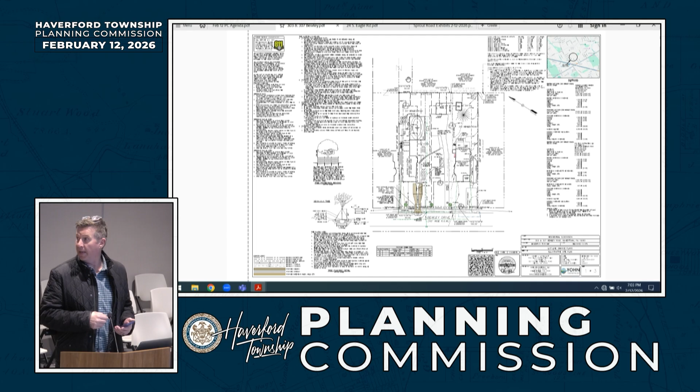So this is I think our third time here. We've had the engineers go and do everything. It seems like everything's been good. That's about it. I don't know. Right, I'm just a homeowner.

Do you want a quick minute to gather your thoughts? But we've just introduced the plan. Yes, good evening, I'm sorry I'm late, I hit a little traffic. My name is Tyler Vu. I am the co-applicant of tonight's meeting with Richard.

All right, so this is a little bit different than what we've seen before. So if I can summarize, we have an application before us for a lot line change. This does not include the construction of a new house as we had previously seen. This would convey approximately 11,000 square feet from 307 Bewley to 303 Bewley.

And I understand that you went before the zoning hearing board in November and received three variances, correct? Yes. Okay.

So the application then is again going to be just a lot conveyance. The only change here is that we have the conversion of an existing concrete walk at 307 Bewley into a driveway. Is that correct? Yes. All right, so there being no land development here, we're just looking at the lot line change.

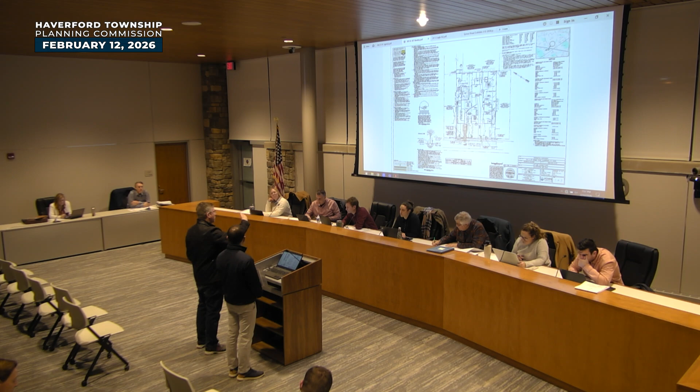Behind there's a narrow piece of property, and then there's an alleyway between Bewley and Valley Road. There's an alleyway in the back where the people on Valley and a couple houses on Bewley have their garages, and I've seen where that would be. I've seen the lines. I've seen wastewater in the alleyway there where that would be, so I'm assuming it goes there.

I do want to clarify, not wastewater, you mean storm sewer? Stormwater. Okay, stormwater. Yes, sorry, stormwater.

So my recommendation is that the storm sewer, if it does continue beyond the point indicated on the plans, that should be marked on the plans. Because as it stands, it looks like that's either the terminus or the origin of that storm sewer conveyance pipe. But if it does continue further back into the property, that should be noted on the plans.

I don't know, we'll have to ask them. Because the easement is shown to terminate.

Actually, I'm sorry, they did a survey, and you know what I'm thinking? I'm looking at the side yard. The easement lines do go all the way through, but the storm sewer pipe itself is shown as ending. So the easement continues to the back of the property, which is fine, but I would just suggest that the storm sewer pipe actually be shown kind of where it continues.

I'm not 100%, I don't know, I'm not an engineer, is what they did. I would have to ask them. Sure, because I'm thinking about it now. There's one that's down the way a little bit on the alleyway, so I don't know if that's a beginning that goes down to the valley or not.

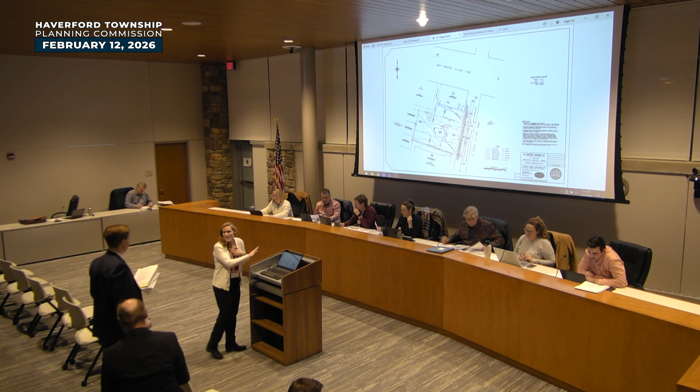Okay, next up we have our applicant for 24 South Eagle Road. This is GK Property Holdings for a zoning map amendment request. For planning commission members who haven't dealt with one of these before, a zoning map amendment request is simply to change the zoning of a particular property to a different zoning district. This is not a land development application, not a subdivision application, and not a change to the zoning district itself or any of its requirements. This is just a zoning map amendment. With that in mind, I'll turn it over to the applicant to further explain their application and hear their proposal.

Good evening, my name is Finton McHugh. I'm from the law firm of Petrikin, Wellman, Damico, Brown, and Petrosa in Media, Pennsylvania. I'm representing GK Property Holdings. With me tonight are Kevin O'Donnell and Greg Giuliano, the principals of GK, and our project engineer, Dave Damon. We were here before you last summer, and you recommended that we request a rezoning of the O1 office portion of the property, so we're here doing that.

We've also amended our plan in response to some of your suggestions. In particular, we moved the building forward, as you'll see in the exhibit package. The previous building was set back intentionally to conform to the 50-foot front yard setback, but in accordance with the Planning Commission's recommendations, and I think the overall streetscape for Eagle Road, we've pulled the building forward. This gets rid of the horseshoe-shaped driveway we previously had, and we created a 90-degree driveway that, also by recommendation of the Planning Commission, lines up with the driveway across the street that goes into, I think, the Starbucks.

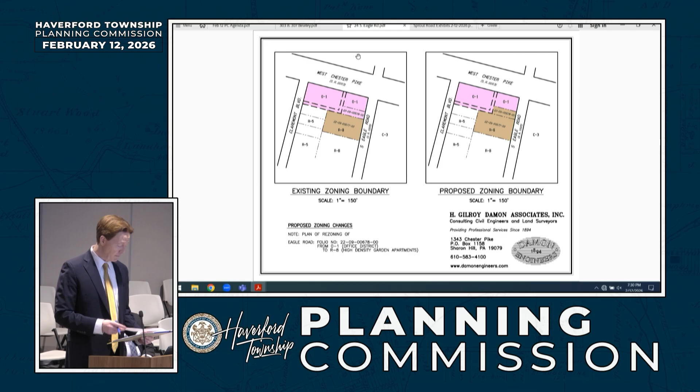If the board has no questions of me, I'd like to ask Dave Damon some questions.

Dave, can you introduce yourself to the board and explain your professional background? I'm Dave Damon, a civil engineer and land surveyor with H. Gilroy Damon Associates. I'm president of the corporation now - I'm like fourth generation Damon involved in that business.

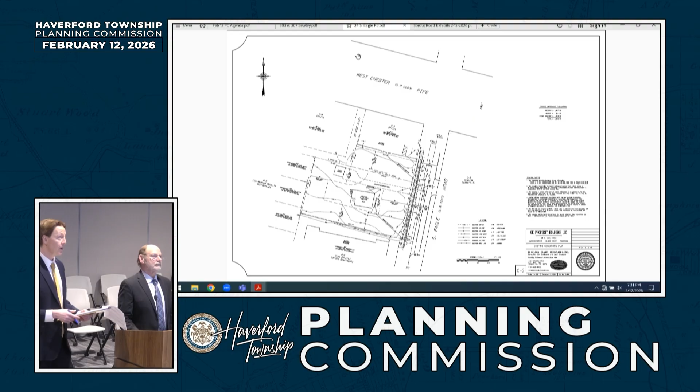That's zoned R8, and it's larger - almost a half an acre, 21,162 square feet. It's just north of the Haverford Arm Apartments, which has a side yard there noted as 11.8 feet.

I don't know if I have all the plans here, but there's a comparison of the zoning - I think Exhibit 2A is an excerpt of the zoning map, and I've crudely highlighted the property. Does that show the property and the split zone nature of it? Yeah, it shows the property, bounded by O1 zoning to the northeast on West Chester Pike.

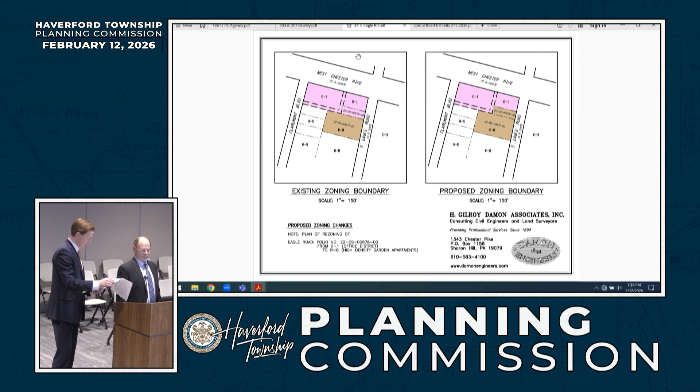I included an exhibit I don't think I have on this computer, but it's a Google aerial photo showing the other surrounding properties you just described. Yes. Exhibit A5 is the color zoning plan, which I've pulled up on the board.

Can you explain generally what's being proposed? Well, as you just said, the building's pulled forward, set back 15 feet from Eagle Road. It pulls back about 130 feet from the Claremont Boulevard residential properties that abut it in the rear. There's a single right-turn-in, right-turn-out driveway. It provides the 20 parking spaces required for zoning, and it provides a turnaround for trash and delivery trucks.

Does the back of the site have the required buffer planting strip? It has to, and actually there's over 50 feet of green space there, which provides the open space required under the ordinance. So quite a bit of buffering could be done there, including a raised berm. I know there were concerns about people hearing noise from Primo's Hoagies and the adjacent apartments, so that's something we could address there to help buffer those properties.

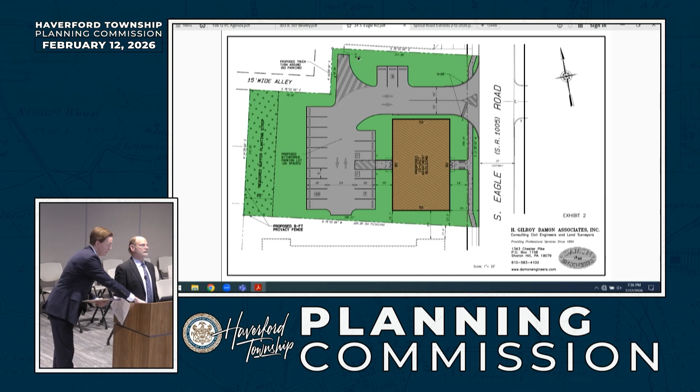With the consolidated properties and the change to R8 zoning, it would still have a non-complying lot area. Required is 2 acres, it's only 0.596 acres. It complies with the street frontage of 50 feet with the consolidated lots. Building coverage would comply at 15.4% versus 20% required. It's just over on impervious cover, so in the final design it's possible we might bring that into compliance. The front yard and side yard are the two big dimensional variances we'd have to obtain. And for the rear yard, we maximized that to 125 feet.

So we would go through with zoning before the lot consolidation and land development process? Yes, if the zoning change is approved, the next step would be land development.

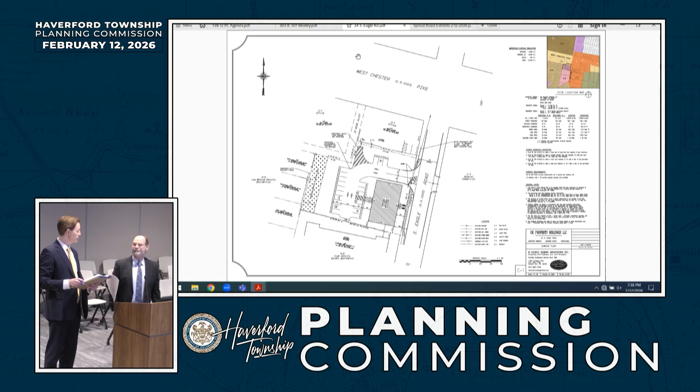Do you have any other comments on how this acts as a transition or generally fits with the neighborhood? As far as the comprehensive plan, it provides housing in a mixed area, giving residents of the apartments the opportunity to walk to the commercial areas, so I think it creates a livelier setting than what's there now. I have no further questions.

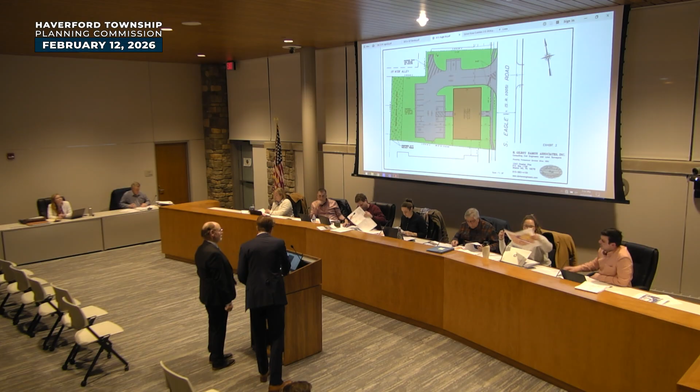On A2A, just so I'm super clear, that red outline, it's just this little sliver here, right? Can you put this one back up on the screen? Yep, that's it. Okay, I'm clear, I don't have any other comments or questions on that. I'm fine.

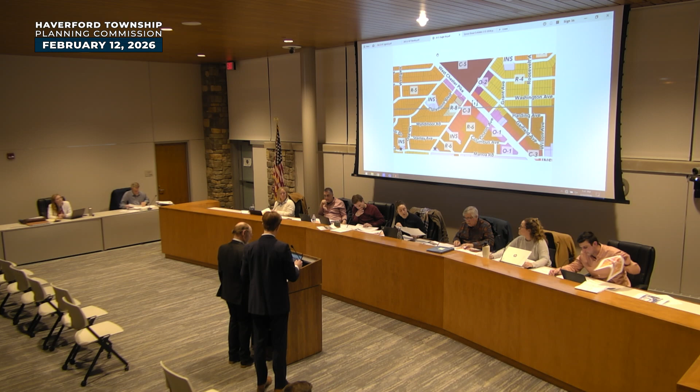Thanks. If it's helpful, the A2B exhibit is the clearest to me, identifying the parcel numbers for each of the two parcels, showing it going from pink to the brown. I see it, I was going to say fawn, but it's the color of the day. Taupe, tan, ecru. I think ecru is a little light.

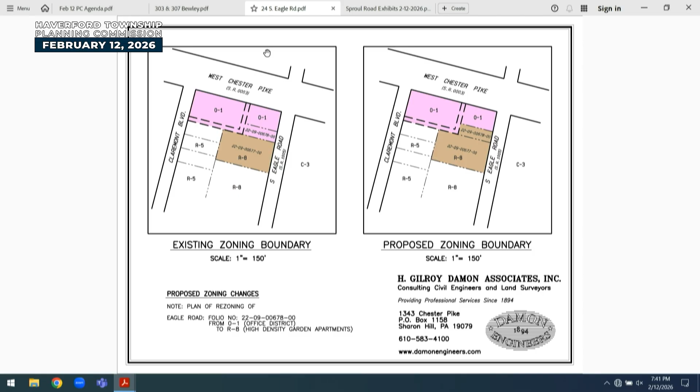Kim? No comments. I appreciate you guys listening to our feedback, incorporating it, and it's great to see you back here for this request. Angela?

No, I have no objections to what you're proposing here. Just out of curiosity, when you were in the summer, you were looking at property across the street. Is that still being pursued? Yeah, we're still pursuing that, preliminary final plan submittal coming soon. Okay, but didn't that involve a zoning change also? Zoning wasn't changed, variances were granted. Oh, you already went through that, okay.

I have no comments. This is, as you noted, a recommendation from us from when you first came before us. So I have no additional comments or questions on this. Thank you.

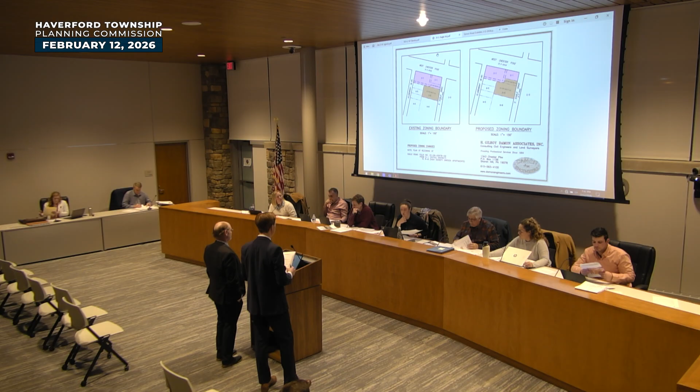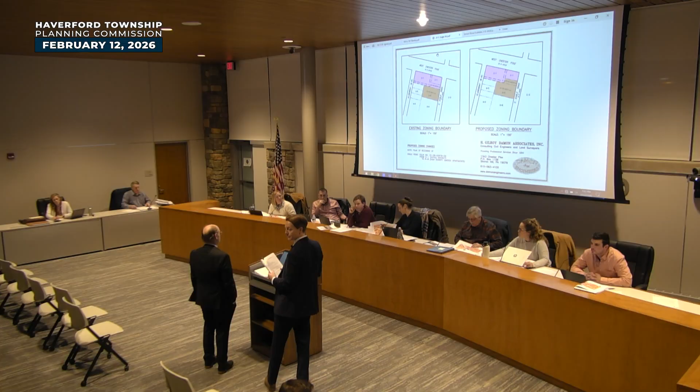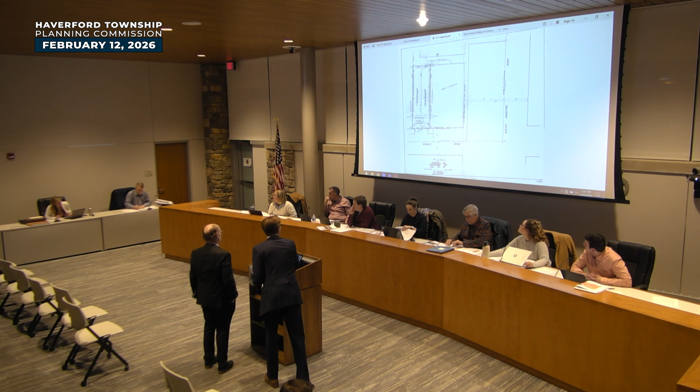Was the site previously anything else, or was it always just kind of a vegetated parcel? Single-family home. No, just the small sliver one? It was always kind of zoned together, and owned in single ownership by that single-family home owner.

Okay, so if these are combined, does the larger parcel now have access to that alleyway? That's a good question. My understanding is anytime you have an alley, something called an alley on a recorded plan, anyone who touches that has the right to use it as an alley. There's some physical constraints there that I don't think we intend to use it as an alley. The smaller parcel was originally part of a subdivision plan that included that alley when it was created, so definitely that has access to it.

But based on the one homeowner who uses the alley coming from Claremont Boulevard, the part that goes out to West Chester Pike has encroachments over it, it's kind of used for parking, so it would be difficult to open that because they're using it as parking. So legally opening and using it wouldn't be simple. You'd run into objections from the adjoining property owners. Okay.

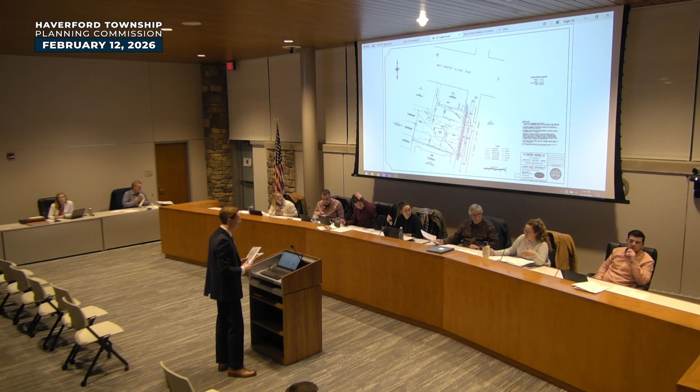Just looking at what you proposed, one thing to consider as you continue to refine your design is to take a close look at your parking requirements. There might be a case where the amount of parking required to operate the building is less than required by code, and therefore less impervious surface would need to be added to the property. Just a consideration moving forward. Okay, thank you very much.

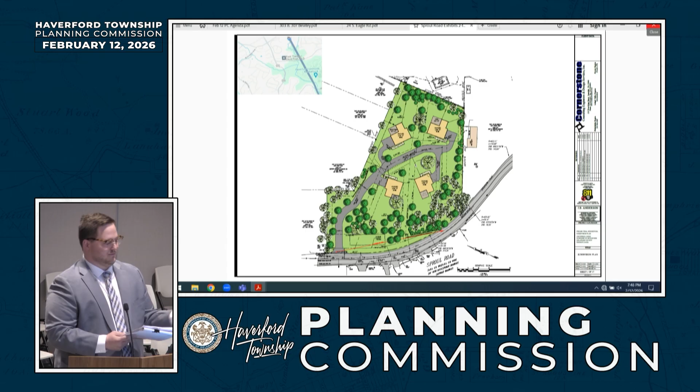Originally, we were before the Planning Commission last February, where we received some comments regarding stormwater design and some utility designs, among others. So we went back to the drawing board, implemented those comments, and subsequently attended the zoning hearing board.

As you will see, and as our engineer will go through, there are a significant amount of very steep slopes and steep slopes on the property. So it required relief to disturb those slopes and also to have uses in those steep and very steep slopes, like utilities and the access drive.

We were granted that zoning hearing board relief in May, then revised our plan and resubmitted, and we were before the Planning Commission again last September. We had some additional comments, more minor than the February ones, but there were some outstanding items.

The Planning Commission wanted to review an alternative open space plan, and in addition, have more information regarding the shoulder widening. At the end of that meeting in September, obviously no recommendation was made on the plan, but we did walk through the recommendations for each waiver we were requesting.

That brings us to tonight, where on our third attempt at the Planning Commission, we would be requesting a recommendation of preliminary final approval on our plan.

In terms of the waivers, considering we had gone through each one at the last meeting, we're requesting seven waivers altogether. Four of those seven the Planning Commission had recommended to approve, and two of them were in regards to the preliminary final waiver request. Our hope is that the Planning Commission would reconsider at this time, given that we've submitted four times to the township engineer, so they've had quite a few opportunities to cycle through this and review.

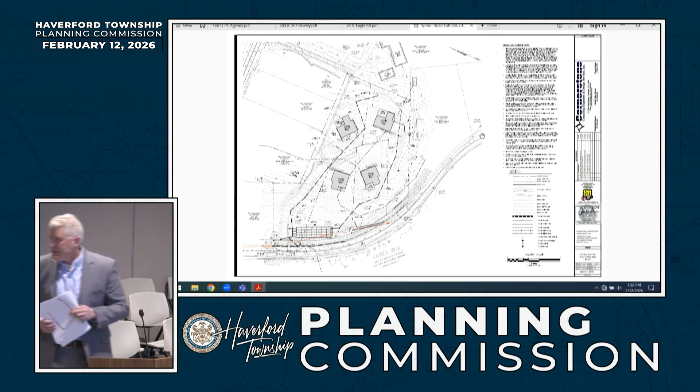Those are basically the major points for the plan revisions. It's essentially the same project, a 4-lot subdivision, but we've made some significant advances, number one with PennDOT, stormwater, and sanitary sewer collection.

Thank you. Quick question for the stormwater. Please remind us what the shared maintenance and access agreements are for the individual rain gardens and then the shared system at the bottom of the driveway.

So the rain gardens are located on individual lots, but the collection piping does go through various lots, and the underground basin where all this water drains to is split between lots, collecting from various impervious surfaces. There will be a homeowners association for this project, and that shared maintenance will be indicated in a homeowners agreement and delineated. If we're successful to move forward, Kim's job is to start preparing that agreement so it can be presented to the township for review. It would be part of a shared maintenance for all 4 lots.

And is there an easement denoted on the site plans that will be recorded with the land development? For the stormwater management, it would be a blanket easement, just because it's so complicated throughout the site. And I think a blanket type method allows access throughout the facility for cleaning, maintenance, and repairs. Okay, perfect. Thank you.

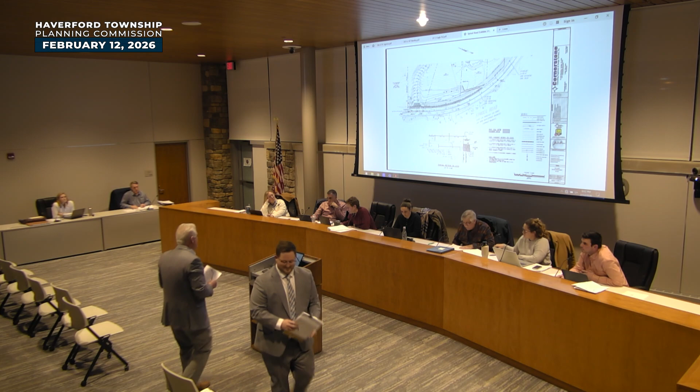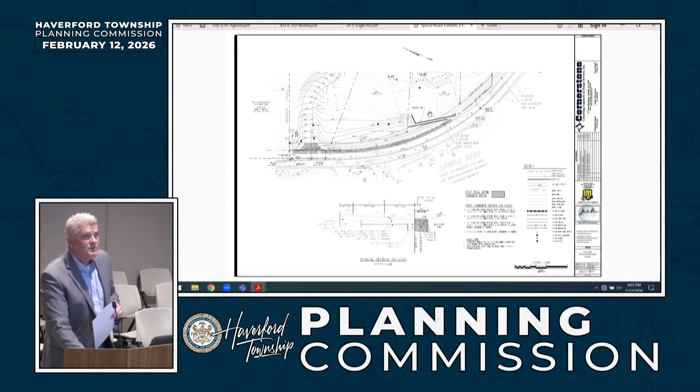Kim summarized it very well. In the area of our available sight distance, these 2 retaining walls allow us to regrade the frontage to provide that sight distance. This back area here we're not proposing to touch — as you can see, these contours come down almost directly to the edge of roadway, and there are exposed rock surfaces in that steep slope area. So in order to provide a continuous 4-foot shoulder all the way through this area, we'd be excavating and encroaching into an extensive rock face, and most likely extending onto the neighbor's property as well.

We'd be carving back and then basically encroaching into additional steep slopes along that frontage.

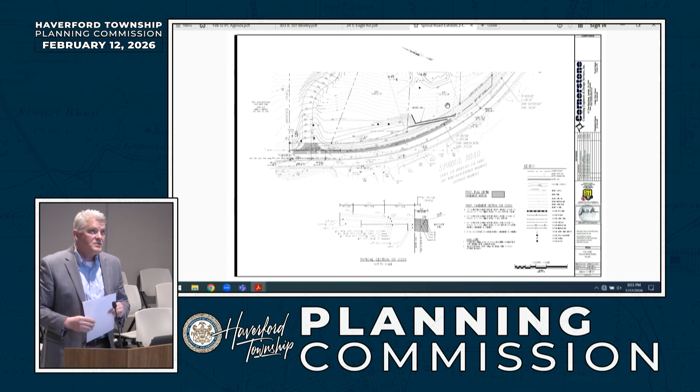Sure. So this is a shot — we're looking downhill, in an east or southeasterly direction. This is the existing driveway that's here. If you think of it that way, Sproul Road starts to flatten out as it gets up towards Darby Road, but as you extend down towards the creek in a southeasterly direction, you start to see the steep slopes that are being developed, and you can see the white line at the edge of pavement.

We're advanced further downhill. You can see this area here — this is part of our road widening and our sight distance work, where we're going to be digging out this area to provide our available sight distance.

Now, the weather switched here, but this is the neighbor's driveway downhill of our site, basically plan right. You can see there's an existing tree mass here. If we were to widen this road to be a consistent 4-foot widening, we'd be hogging out this steep slope area and removing all the existing vegetation. So what we're trying to do is match our sight distance line with the road widening, and ask for a partial waiver of not doing that extra 24% of frontage.

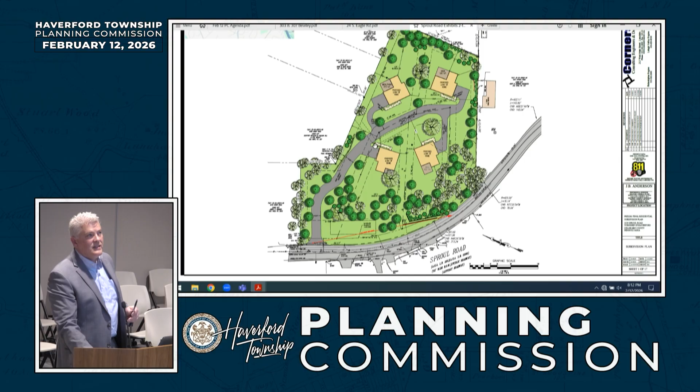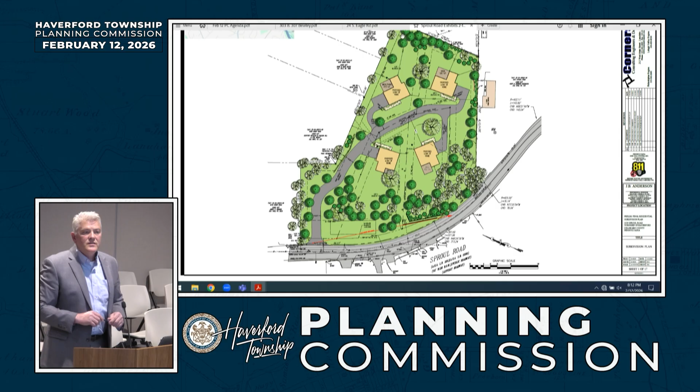The way it's organized, Lot 1 starts here, then 2, 3, and then 4. We could look at taking Lot 3, tying it into the line for Lot 2 as it extends up, and then Lot 1 joins that, and then Lot 4 would join it over here, and then one line out from there. There's many ways this can be designed, and it's a function of what type of pump manufacturer we select and how they prefer to do that. So right now, we're just showing 3 lines, and we could condense that to 1.

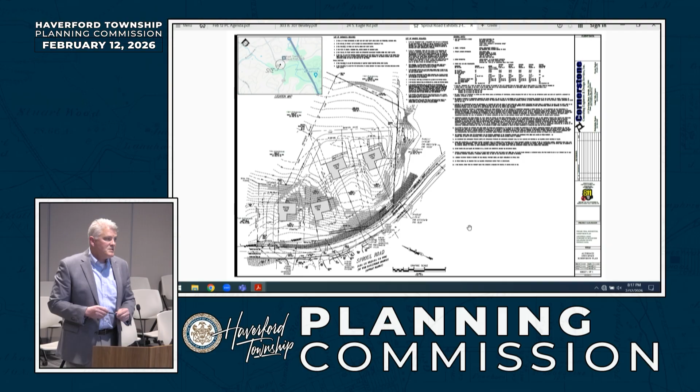Okay, but I guess, so you're pursuing the fee in lieu of, and then if it goes to this, then it would probably basically be a redesign, or it's a... This would be a totally separate new design. All right, so yes, we would be back in front of you. We'd be back in front of the zoning hearing board and also back in front of you guys.

Gotcha. Steve, we wanted to make sure they could demonstrate that they could provide the open space and still end up with 4 lots, and I think the sketch plan they provided accomplishes that. Gotcha, okay. Yep, that's all I had. I don't have any comments. Okay, thank you. No comments, thank you.

Thank you. All right, I'll wrap up with a couple things. So I had a question about the light as well. So the only street lamp that you're proposing is the one down at the bottom of the driveway with Sproul. Yeah, it doesn't mean that individual homeowners may want an individual light up top, but yes, we're only providing one down below. Okay.

Didn't seem necessary to illuminate the entire driveway for a 4-lot subdivision, but we would definitely take the comments of the planning commission and provide a more illumination, higher fixture and so forth. So I would defer to Angelo and kind of the recommendation for lighting, if you feel a higher light would be more warranted given the site conditions there. Or at least some photometrics that indicate what they're proposing is adequate.